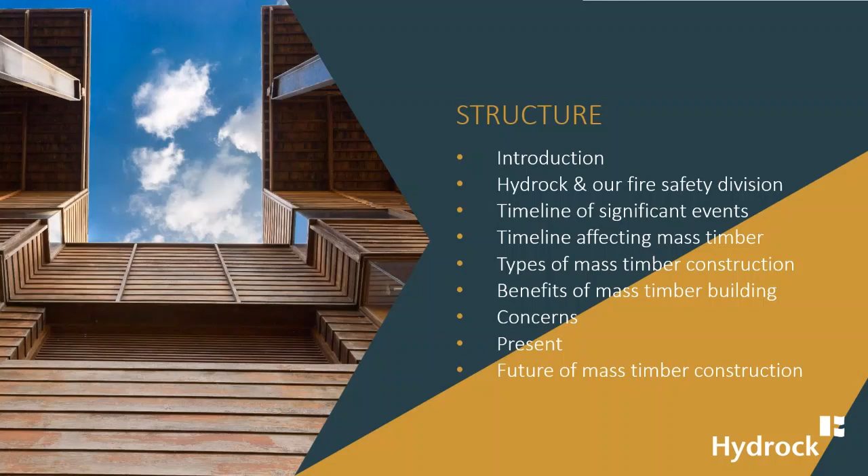So, moving to the introduction. The objectives of this webinar are to review the opportunities for timber construction and the benefits it provides, the obstacles for its use within the construction industry at this time with regard to fire safety, what the future looks like from today, and what we feel needs to happen.

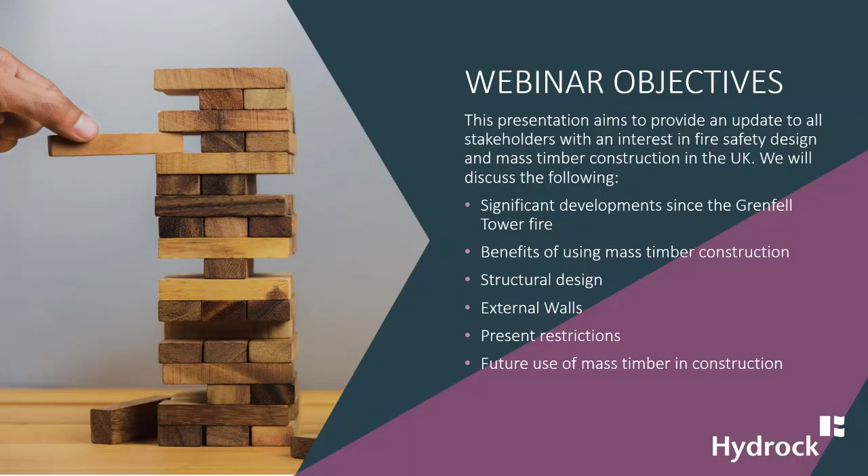In this section, I will provide a brief introduction to Hydrock and the Fire Safety Division. Hydrock is a multidisciplinary engineering design consultancy with over 500 staff operating from 16 UK offices, including Manchester, London, Birmingham, Bristol, Cardiff, Glasgow and Leeds. We provide a number of engineering services across the built and natural environment.

Hydrock's Fire Safety Division was founded in 2017 and now has 25 fire safety professionals working in many of the UK's regional capitals, including London, Bristol, Cardiff, Manchester, Birmingham and Glasgow.

Our team has a broad range of expertise and experience ranging from fire engineering, fire risk management, nuclear industrial fire safety, expert witness, structural fire engineering, and specialist services, which includes computational fluid dynamics modelling, blast design, and evacuation modelling.

We have a few examples of projects the Fire Safety Division at Hydrock have worked on and the types of services we provided. Phase 1, Hunslet Road in South Bank, Leeds. This was a residential development initially consisting of 315 homes with room for expansion, commercial, cafe, gym and retail spaces. We provided fire engineering, fire risk management and specialist services, notably computational fluid dynamics modelling, the extended residential common corridors and mechanical smoke ventilation systems.

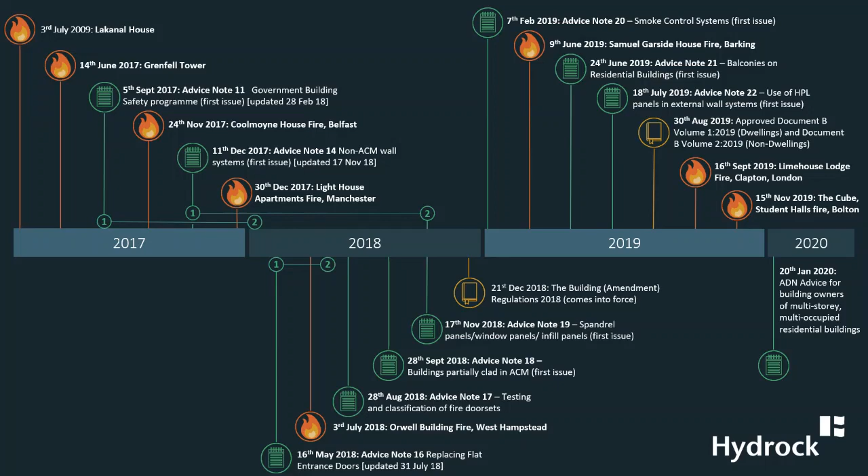The Grenfell Tower didn't contain any timber elements within the external wall construction. However, the tragedy obviously did spark a review and discussion into the use of combustible materials in residential external wall construction, and quite rightly set the fire safety industry on this journey.

The Building Amendment Regulations 2018, which came into force on 21st of December 2018, banned the use of combustible materials, defined as anything worse than Class A2, in external walls of high-rise residential buildings with a storey more than 18 metres above ground level.

The document defines the external wall as the full build-up from the external layer to the internal room lining, excluding any decoration or other finish applied to the internal lining surface. It does include a number of items within external walls of qualifying buildings which are exempt from this ban; however, these do not include any form of timber used for building structure or cladding.

Therefore, essentially, the amendment to the building regulations has banned the provision of any timber within external walls in high-rise residential buildings, whether used for structural or cladding material.

Advice Note 22 was released by the MHCLG on the 18th of July 2019. This advice note was released for building owners of high-rise residential buildings that contained high-pressure laminate cladding panels. At the time, MHCLG had conducted full-scale BS 8414 tests with HPL cladding panels and found that the wall systems could achieve performance criteria BR135, providing the HPL achieved Euro Class B with regard to surface spread of flame and was combined with a non-combustible mineral wool type insulation.

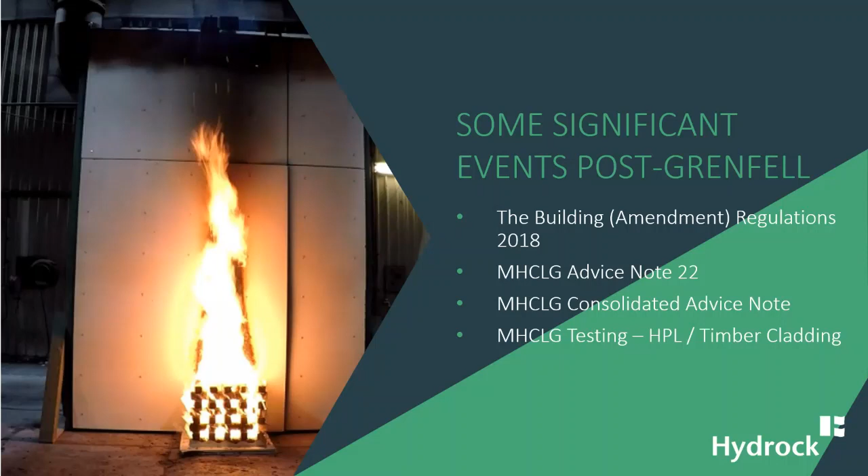However, the document also states that the external wall construction of buildings with no storey more than 18 metres above ground level should be risk assessed to confirm the functional requirement B4 of the building regulations is met. Functional requirement B4 being the external walls of the building shall adequately resist the spread of fire over the walls and from one building to another, having regard to the height, use and position of the building. The new advice note therefore advises designers and fire safety professionals to consider the risk presented by combustible materials in external wall construction to confirm the functional requirement of the building regulations is met in buildings of any height, even where less than 18 metres.

Before we go into too much detail regarding properties and performance of timber, I just wanted to go through some of the main types used in construction. The more common types I'd like to cover in the presentation are dimensional solid timber frame, glue laminated timber, cross laminated timber, laminated veneer lumber, dowel laminated timber, and nail laminated timber.

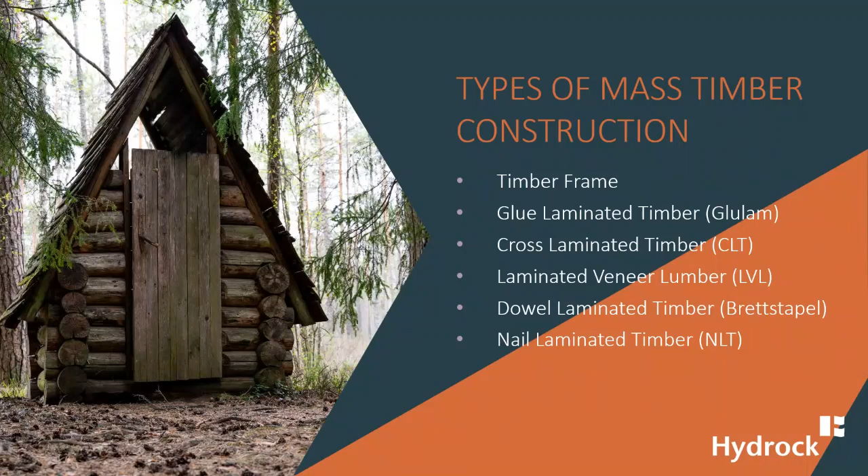Timber frame construction involves the use of solid timber to form a structural frame with a similar approach to that of a steel frame, including beams, columns, and rafters, etc.

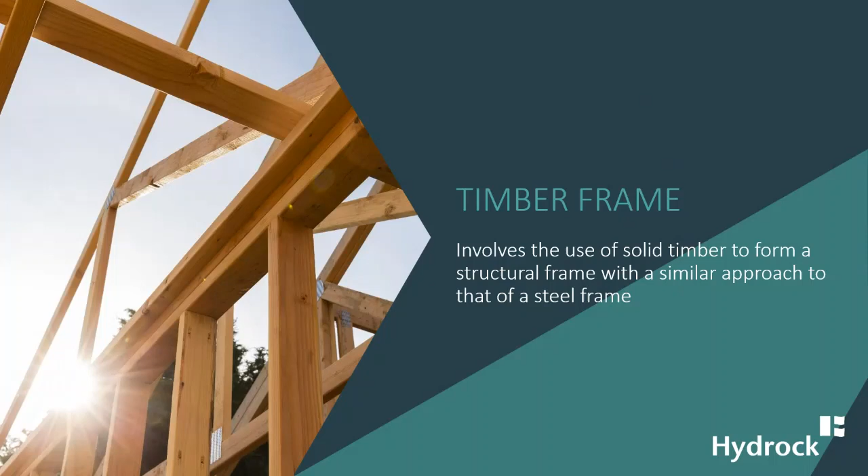Glue laminated timber, also known as glulam, is comprised of a number of layers of dimensioned timber that are bonded together with structural adhesive to increase the structural performance. Generally, the grain runs parallel to the main axis of the member. By laminating a large number of smaller timber elements, a single, larger, strong structural member is manufactured. This type of timber construction is often used for beams and columns where appropriate.

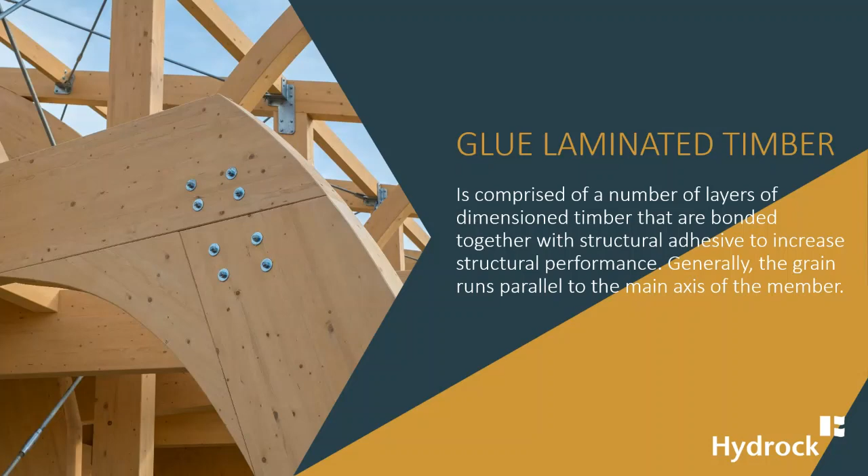Cross-laminated timber, also known as CLT, is manufactured from lower grade timber offcuts, which are reduced to strips that are finger jointed and glued in perpendicular layers under high pressure. In the factory, the solid CLT panels can be cut to the required shape and size.

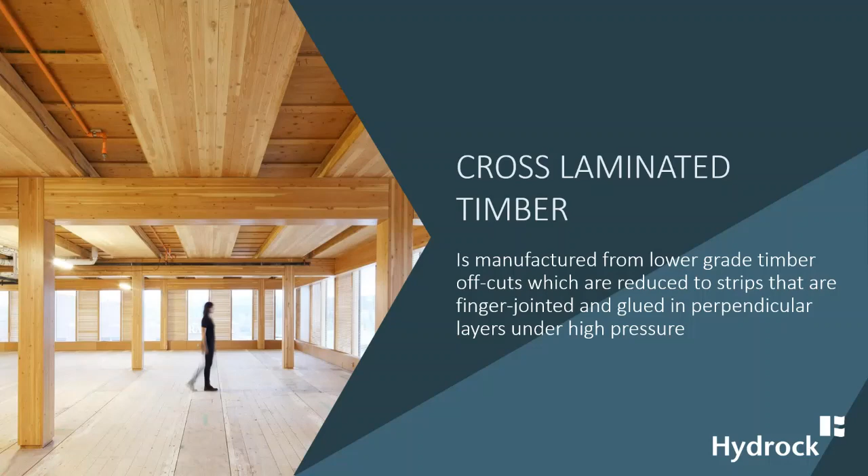Laminated veneer lumber, also known as LVL, is manufactured from thin, peeled veneers of wood, usually 3 mm thick, and glued with structural adhesive. Panels of LVL are cut into structural members, which have a high strength and stiffness. This type of timber construction is often used for beams and columns where appropriate, similar to that of glue lam.

Dowel laminated timber, also known as dowel lam or Brettstapel, is fabricated from softwood timber layers stacked in one plane and connected with hardwood timber dowels. This relatively simple manufacturing method has the potential to utilise lower grade timber that would otherwise be unsuitable for use in construction to form load-bearing, solid timber wall, floor and roof panels.

And nail laminated timber, or NLT, similar to dowel lam, however, nails are used to connect the timber planks into a solid wood panel.

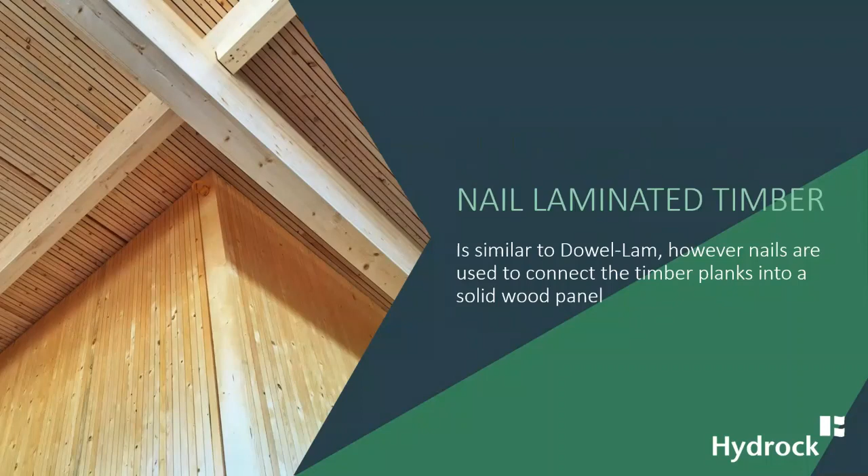We know timber has a host of benefits when used in construction, some of which I'm going to cover in this section.

From a sustainability perspective, the rotation of construction timber harvesting varies depending on the location, type of wood and intended use. However, it typically ranges from around 35 to 70 years. That kind of time frame may be considered significant in a human lifetime scale, however, is a mere blink of an eye in any geological timescale with regard to replenishment of rocks and ores for other building materials. That's the basis, the reason timber is considered the only widely used building material that can be considered truly sustainable.

Environmentally, during the growth phase of a tree, carbon dioxide is sequestered into the tree via carbon dioxide processing in the canopy and uptake through the soil. Utilising the harvested timber for long life cycle products, such as building construction, allows the benefits of this sequestered carbon dioxide to be maximised. The rate of uptake of carbon dioxide into trees is highest during the growth phase, and therefore logic dictates that the greatest environmental benefits from forests with regard to removal of carbon dioxide from the atmosphere can be achieved by using managed forests where trees are kept growing. They are then harvested for long life cycle products, and new trees are planted to maintain constant growth within the forest.

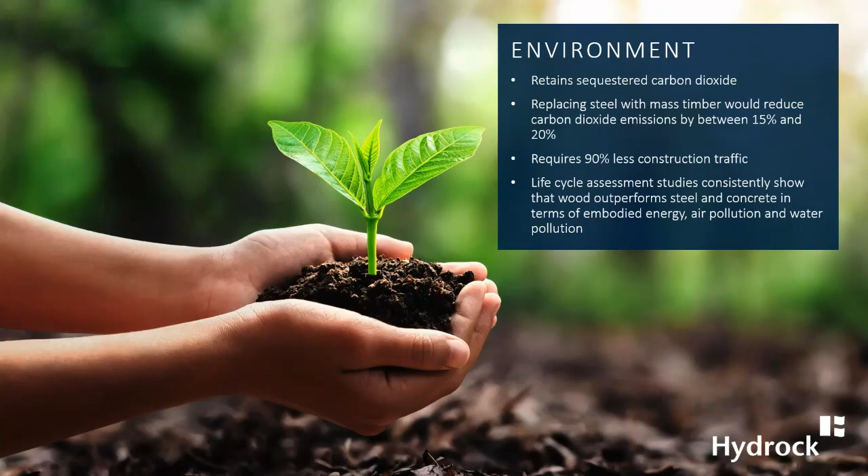From a construction perspective, as I mentioned previously, mass timber buildings are approximately 25% faster to construct than concrete buildings. It's also considered a highly versatile material in both its structural performance and appearance. With new engineering techniques, timber can be manufactured to achieve almost any structural objective, from beams and columns to walls and floors with long unsupported spans due to its high strength and weight ratio.

We'd all agree that timber is aesthetically appealing in design and offers huge versatility in appearance, and we have significant evidence that timber is a durable construction material, with a catalogue of buildings lasting centuries, even without modern protection techniques.

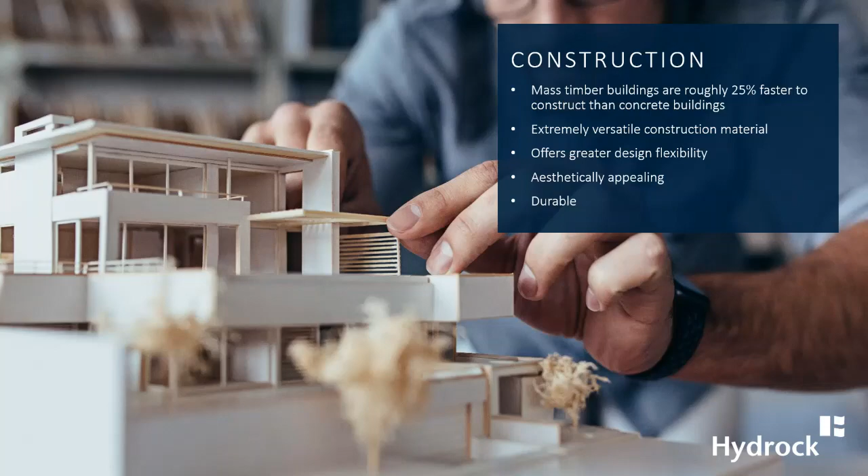Timber construction allows manufacturing and prefabrication off-site, reducing installation time and overall construction program and allowing buildings to be occupied sooner. Timber also generally requires less demand for skilled worker resource.

Current cost estimates of high-rise timber buildings to date have been slightly warped by additional costs associated with research and development, due to the current innovation of the design. However, with greater understanding and supply availability, timber construction seems to be a highly cost-effective construction approach, even for tall buildings.

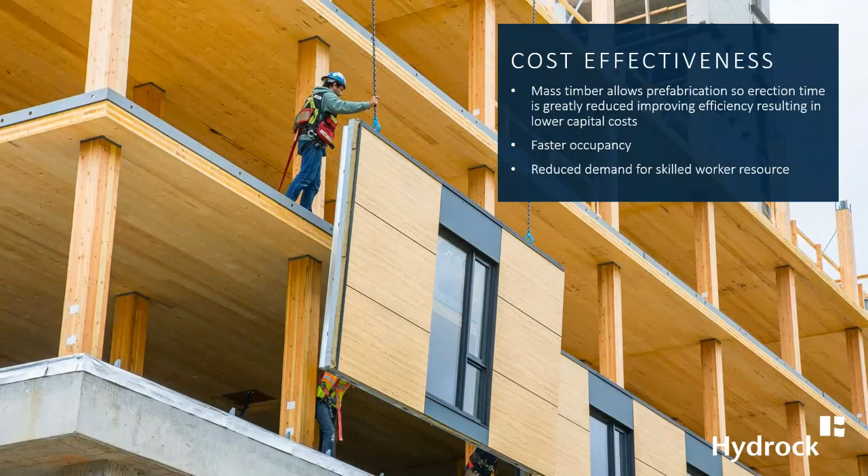Fire is, of course, the first concern that comes to mind with wood construction. However, there's a great deal of evidence to suggest mass timber is actually safer in a fire than steel, with regard to structural stability in a fire scenario.

At high temperatures, timber decomposes, which results in char and the release of flammable gases which ignite and result in fire. However, the char formed on the surface of the timber helps to protect and insulate the unburnt wood below, and maintain the element's structural integrity and load-bearing capacity.

Wood burns slowly at approximately 0.65 millimeters per minute, and it's even possible for the char layer to reach a thickness sufficient to halt the production of flammable gases and self-extinguish the fire.

There are two key strategies to providing adequate fire protection to timber performing a structural or compartmentation role. The first is full encapsulation. This involves encasing the timber within sufficient non-combustible products, such as plasterboard, to prevent pyrolysis of the timber for the entire duration of the required fire resistance period. In this case, the combustibility of the timber need not be considered.

The second is to demonstrate auto-extinction will occur. This involves demonstrating that the timber char will self-extinguish in a compartment fire scenario prior to the integrity of the timber element failing. This may involve the provision of partial encapsulation to prevent pyrolysis of the timber for an initial duration.

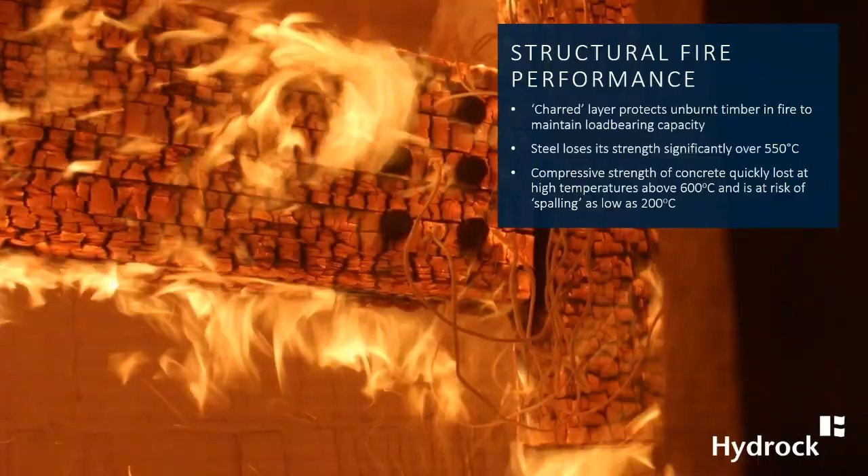Cross-laminated timber, or CLT, has become widely popular in the modern construction industry due to its improved sustainability statistics compared to traditional building methods, and ease of installation, as I mentioned previously.

CLT has a wide range of applications and can be used as part of a hybrid structure or as a sole building material. CLT is primarily used for walls, roofs and floors. Because of its variance in thickness, it's highly versatile and does not sacrifice integrity in place of sustainability.

Its reduced weight when compared to traditional materials like concrete gives it considerable advantages in terms of total building weight, and allows additional stories on a foundation of the same size.

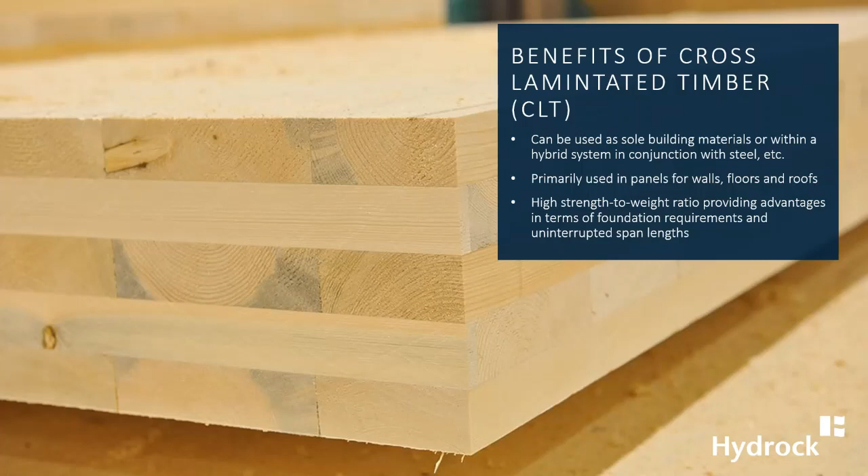The use of CLT is well documented in almost every sector, and there are numerous examples of CLT in everything from high-rise buildings and large commercial office space to single-storey dwellings. A great example of CLT in construction is the East London Tower, Stadthaus.

It's a 9-storey residential building in Hackney, London. The floors, ceilings, elevator shafts and stairwells are made entirely of CLT. When built in 2009, Stadthaus was by far the world's tallest modern timber building.

Another example is Brock Commons, Phase 1, which is a tall timber hybrid student residential building at the University of British Columbia, consisting of 18 stories. The building consists of 17 stories of mass timber construction above a concrete ground level and has 2 concrete stair cores.

The timber floors are 5-ply CLT panels supported on glulam columns. That approach removed the need for load-bearing beams. Steel connectors were used to connect columns between floors to avoid vertical load transfer through the CLT slabs.

The CLT and glulam components were completely encapsulated within 3 to 4 layers of gypsum board.

It's estimated that the timber construction over traditional building methods saved more than 2,400 tons of carbon dioxide from going into the atmosphere. It's also estimated that the cost differential for this project as a result of utilising timber hybrid structure was approximately 8%. However, a large proportion of this was due to the significant research and development costs as a result of the innovative approach at the time of design.

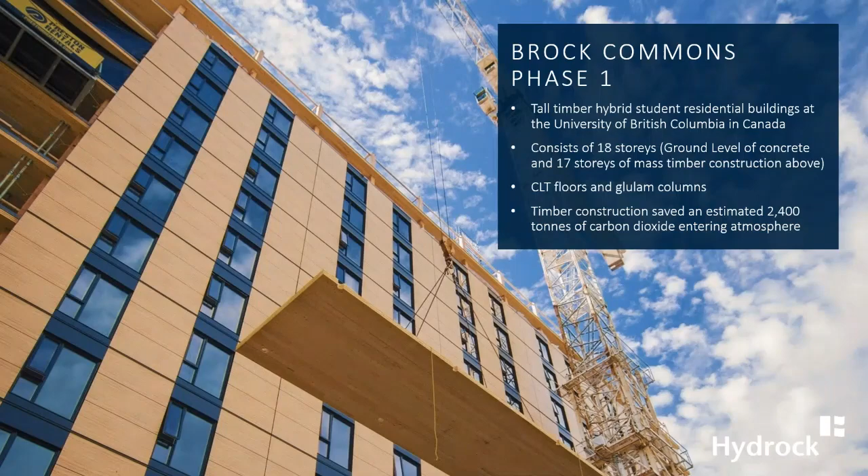There are many aspects of the use of timber in construction that are of concern and require consideration during design, such as maintaining a moisture content less than 20% during site works, the poor performance of timber with regard to acoustics and thermal efficiency compared to other materials such as concrete, and subsequent enhanced measures required to meet these requirements. However, for the purpose of this presentation, I'll focus on the fire safety aspects only.

There are a number of aspects of timber construction that require detailed consideration in design to ensure an acceptable level of safety is achieved. Some are delamination, decay phase continued thermal penetration, and more recently, fire spread via external walls.

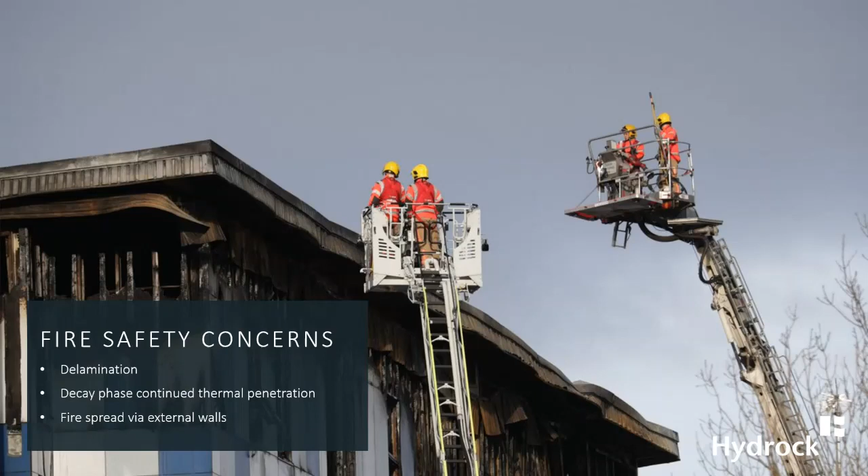As mentioned previously, timber achieves structural fire protection by use of its charring rate. The exposed areas of timber char at high temperatures, protecting the unburnt timber underneath to maintain its structural integrity in fire. However, laminated forms of timber construction, where the layers are held together with structural adhesive, such as glulam, CLT and LVL, are liable for delamination in fire.

Research and testing has been conducted on the influence of the temperature-dependent material properties of the adhesive on the resistance of CLT beams exposed to fire. It's been demonstrated that the fire behaviour of CLT panels is strongly influenced by the behaviour of the adhesive used for the CLT panels bonding system.

CLT panels manufactured with a less temperature-sensitive adhesive show that charring layers almost remained in place throughout fire tests.

Tests with varying extents of exposed CLT in room fire have demonstrated that the exposed timber increased the heat release rate, fire duration, and potential exterior flame propagation where ventilation conditions were low. However, the tests have shown that limited areas of exposed timber might be acceptable subject to CLT type and location of exposed surfaces. Further testing and greater understanding will inform the safe extent and configuration of exposed mass timber surfaces within compartments.

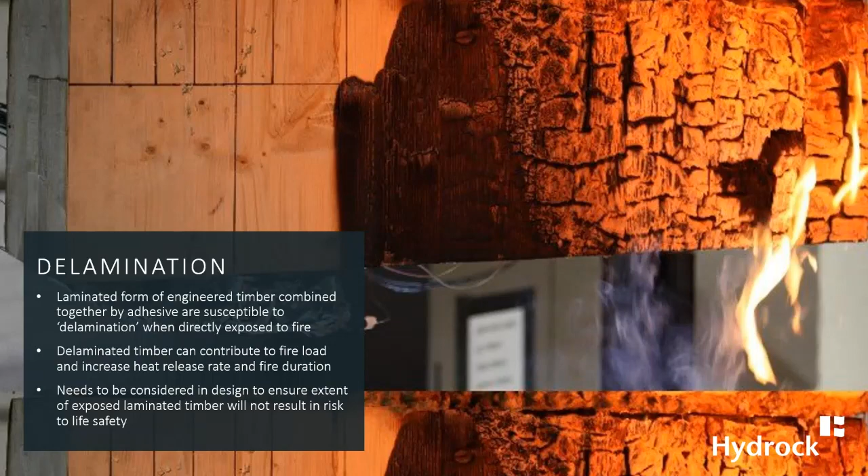In compartment fires with boundaries consisting of exposed mass timber surfaces, such as CLT walls and floors, test evidence suggests that the thermal penetration depth may continue to increase after the compartment fire has been extinguished. This continued thermal penetration results in reduced load-bearing capacity and increased potential for structural collapse during the decay phase of the fire.

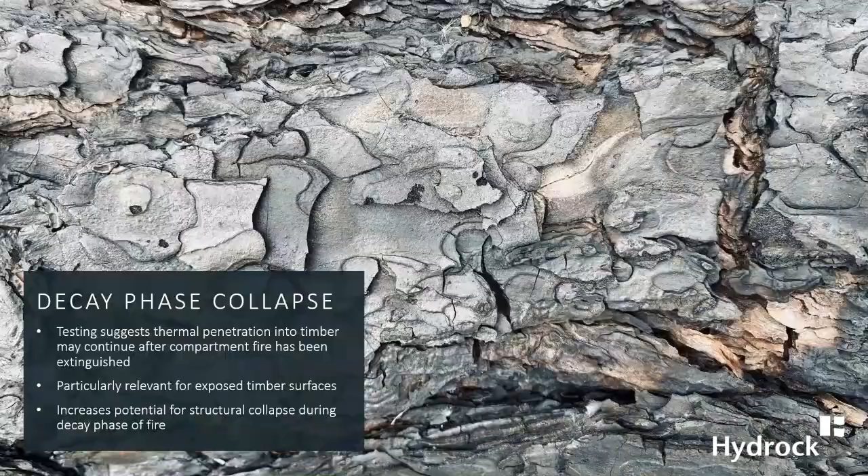Facade systems involving timber as a material are combustible and should be detailed and designed for fire safety to remove the risk of fire spread over multiple stories. To ensure a fire-safe design, it is considered best practice to design in consideration of evidence from research and testing.

It's evident that a significant extent of research and testing has been undertaken for the use of timber structure and compartment fires with regard to structural integrity. However, we still need to do more research. Limited research has been conducted to date to review the impact of timber in external wall construction and its potential contribution to flame spread across the external wall to multiple areas of the building and potential separate fire compartments.

So the situation right now, as I mentioned before, there's a real appetite in the industry right now to utilise timber as a construction material for all the benefits it provides, such as ease of installation and aesthetics. But most importantly, the environmental advantages.

The UK has a target to achieve net zero emissions by 2050, with a number of areas moving towards an even more ambitious target of 2030. Timber has a key role to play on both sides of the net zero balance due to the use of sustainable forestry, removing CO2 from the atmosphere, and less carbon intensive manufacturing, distribution and construction processes, resulting in reduced CO2 production.

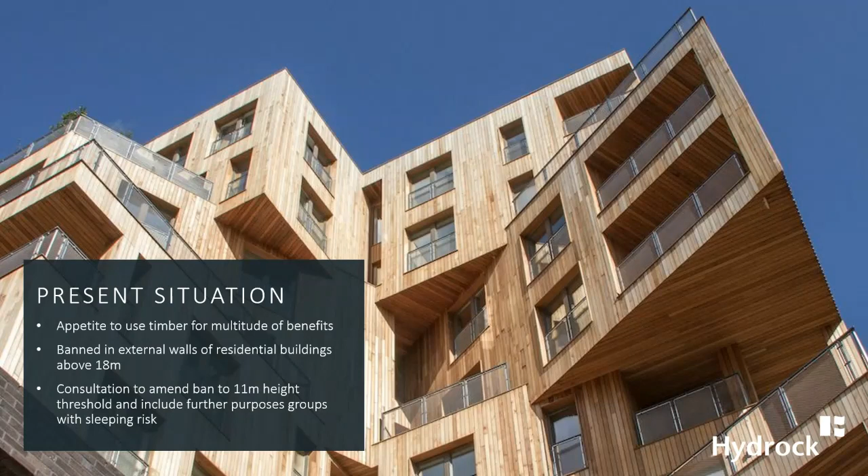The latest revisions of Approved Document B and latest advice from the MHCLG within their consolidated advice note state that in relation to buildings of any height or use, consideration should be given to the choice of materials, including their extent and arrangement used for the external wall or attachments to the wall, to reduce the risk of fire spread over the wall. This is obviously relevant and of concern in buildings containing a sleeping risk.

However, it should be considered in buildings for all purpose groups and heights, particularly where the buildings contain compartment floors designed to prevent fire spread between levels. This includes tall buildings, or where some occupants not within the compartment of fire origin are designed to remain in place for a period of time, such as commercial buildings with a phased evacuation strategy.

As I mentioned before, it's evident that a significant extent of research and testing has been undertaken for the use of timber with regard to fire safety, such as its structural performance in fire, its ability to act as a fire-rated wall or floor, and how to provide passive fire protection.

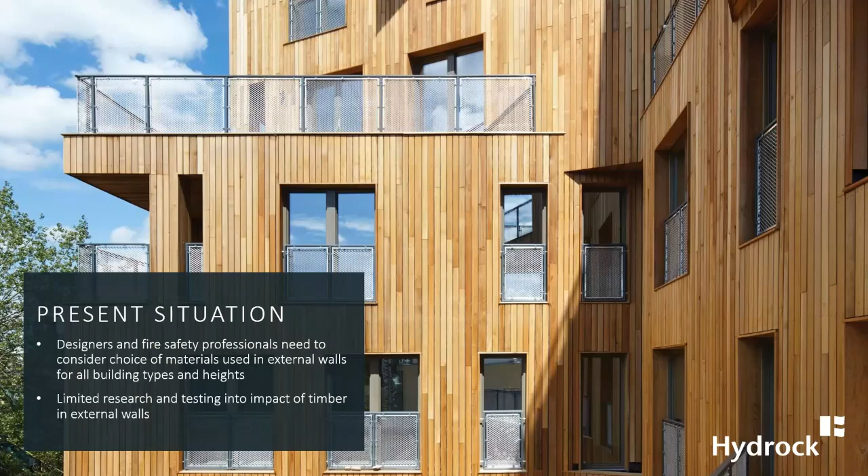However, limited research has been conducted to review the impact of timber in external wall construction and its potential contribution to flame spread across the external wall to multiple areas of the building and potential separate fire compartments.

Based on that, what does the future look like? In the short term, timber has been banned conclusively within external walls of residential buildings with a story more than 18 metres above ground level, and this ban may be extended to include other purpose groups with sleeping risk, and the height threshold may be reduced to 11 metres.

At Hydrock, we feel that this was the right decision by the MHCLG due to the lack of evidence demonstrating timber's suitability in external walls with regard to life safety. Even with the evidence of sustainability and environmental benefits, we cannot jump ahead and let the use of timber construction go unchecked, or consider amending the conditions of the ban without scientific basis.

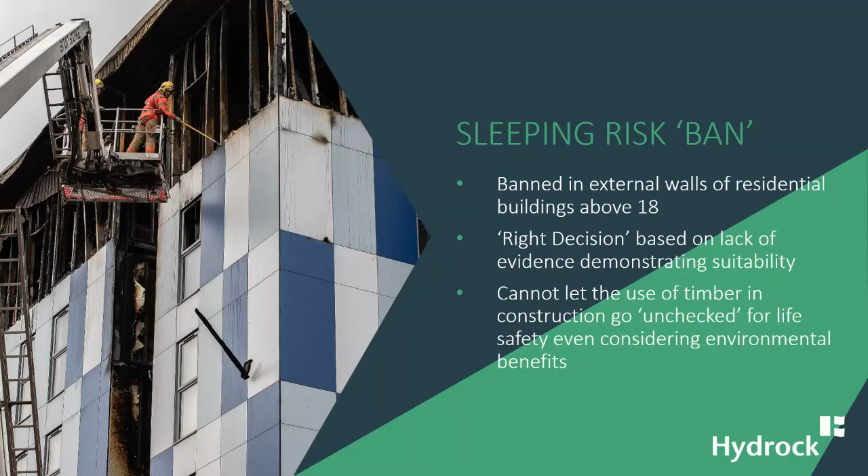Therefore, based on the benefits I've discussed within this presentation, I think it's imperative that as an industry we find a solution to the use of timber in buildings. This will involve further research and testing into the effects of timber within external walls.

The testing will need to include not just types of timber cladding, where multiple tests have already been carried out by the BRE and MHCLG, but more importantly, the use of structural timber, including encapsulated versus exposed timber, and the various types of engineered timber and structural framing strategies, such as CLT walls and floors, glulam and LVL columns, dimensional timber frames, and hybrid systems.

A number of tests have already been commissioned, including a testing program by three of the largest CLT suppliers: KLH, Binderholz, and Stora Enso. The testing program aims to provide scientific evidence of product performance that will allow government to view CLT as a building material suitable for buildings, not just over 11 metres, but over 18 metres as well. The testing will take 18 months, and the data is due to be released as and when it becomes available.

But all in all, it's down to us as an industry to push for the required research to unlock this vital piece of the net zero puzzle.

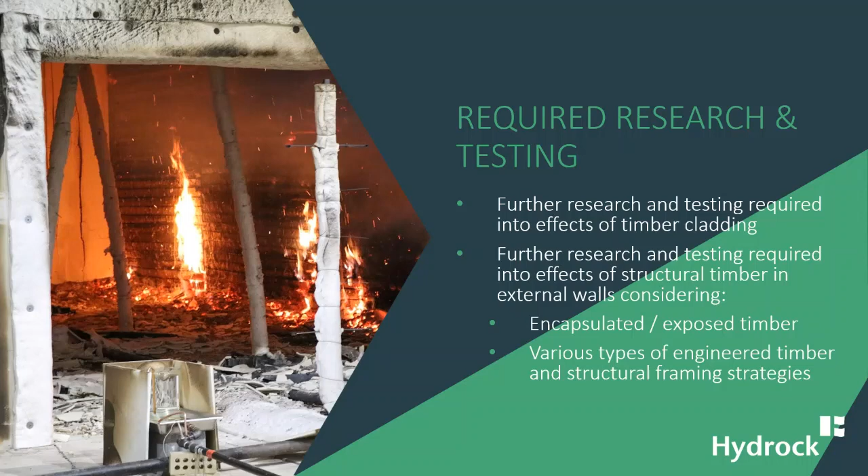Until then, there is still plenty of opportunity to utilise timber in construction in buildings with a simultaneous evacuation strategy and no sleeping risk, where the rate of flame spread across the external walls is of less concern. However, it still needs to be considered.

There is potential to utilise timber construction within any building or external wall that is not subject to the government ban, providing it's considered as part of a fire risk assessment by a fire safety professional.